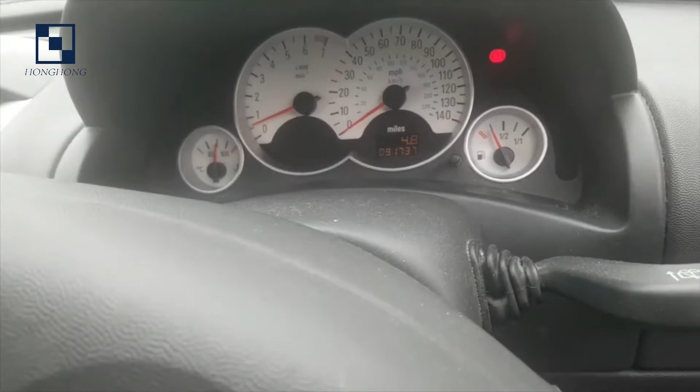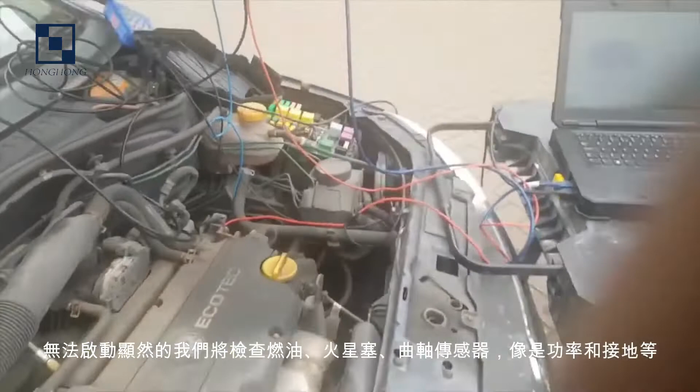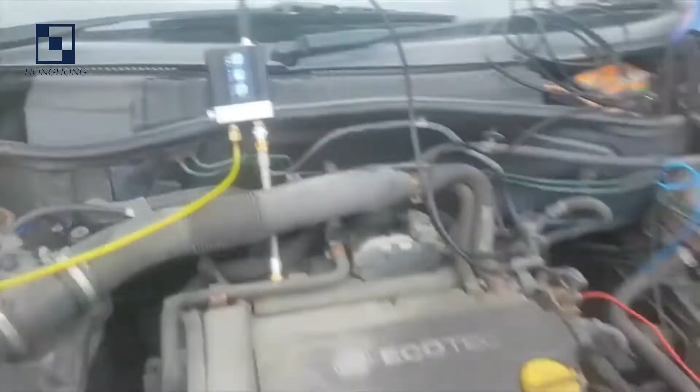There's no fault codes on the dashboard and there's nothing that flags up when it is faulting. So a quick scan check actually didn't reveal anything, which is slightly annoying. Yet sometimes it will crank with no start. So crank no start, obviously we're going to be looking at fuel, spark, crankshaft sensors, things like that, powers and grounds, etc. So immediately what I did was I got hooked up WPS into the fuel pressure rail, and underneath

we have a crank sensor, which hopefully you can just about see through there, and we have that back pinned out on the two pins. This is a floating sensor, so obviously we have to back pin both sides, and then if we want to do any calculations we can use the maths channels within the Pico 7 software.

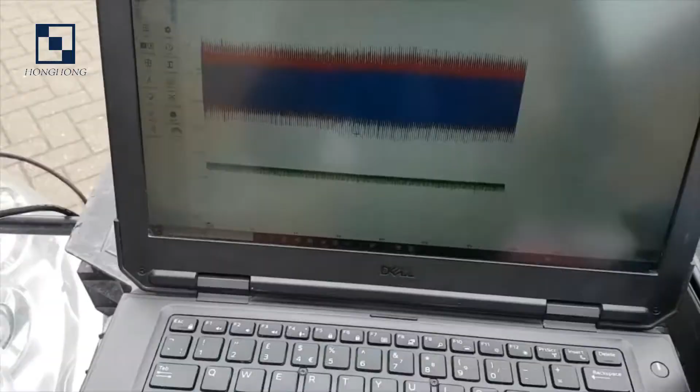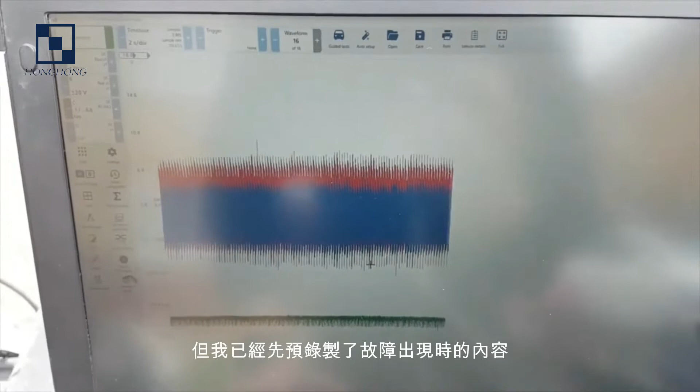What's really interesting is when we're watching this sensor we can actually see that the amplitude sometimes changes between the two channels. Now as I said, this is an intermittent fault as well, so the likelihood of it playing up whilst I'm recording is very, very unlikely, but I have managed to get some pre-recordings of this with it actually faulting. So there we go, we can actually see that just there all of a sudden it's just changed its amplitude. Now the actual note of the engine is still the same, but we can clearly see that we've got something going on that isn't quite right, that something's changing.

You can see there. This is just coming from the sensor, so like I said, it's just purely an inductive sensor. It is floating. I hear a lot of people say we should be actually checking at the ECU itself. The ECU is buried on this, so to actually try and get to it is a bit of a nightmare. But what we thought we'd do is, based on ease and accessibility, we've just gone straight to the sensor, and already we can see that something isn't quite right.

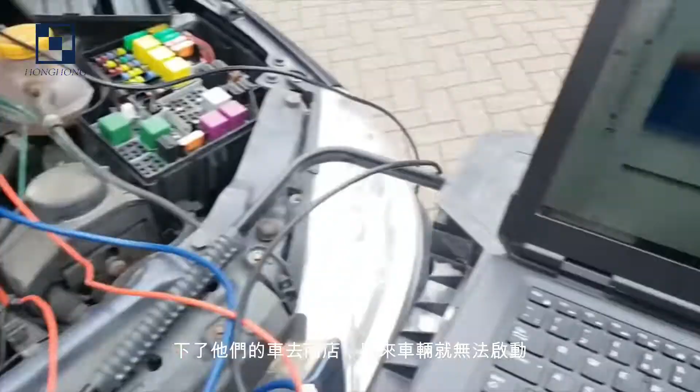So what I'm going to do is I'm just going to leave this recording and we're just going to see if we can capture this on the screen. You can see here that the engine is actually up to temperature as well, so another interesting point to make. This actually was first noticed by the customer after they'd been on quite a long drive, pulled up, got out of their vehicle and went to the shops, and then come back out and the vehicle wouldn't start. Left it for a few more minutes and then it did actually start up. So we do think that we are looking at a temperature related fault.

And as I said, the likelihood of this actually doing it now is probably very unlikely, but we're going to keep watching and keep filming and hopefully we'll get to the bottom of it. What I'll do is I'll actually put the camera down on the engine bay and I'll record my screen at the same time, so when the fault does happen I can quickly catch it. You should be able to see that the engine and the engine note will also change as it tries to recover from a complete loss of what would appear to be a crankshaft position sensor.

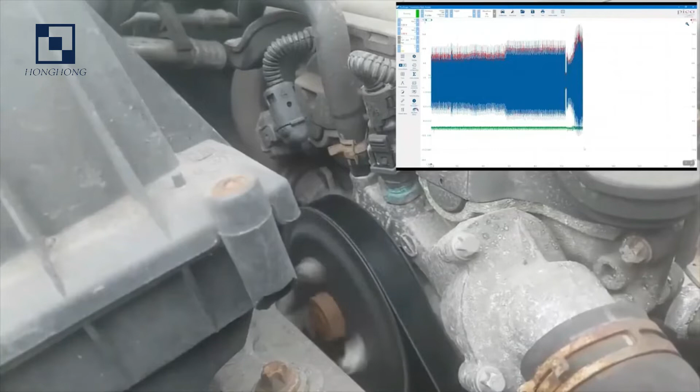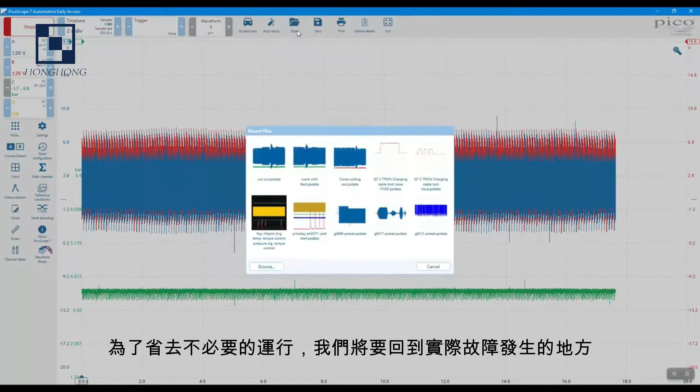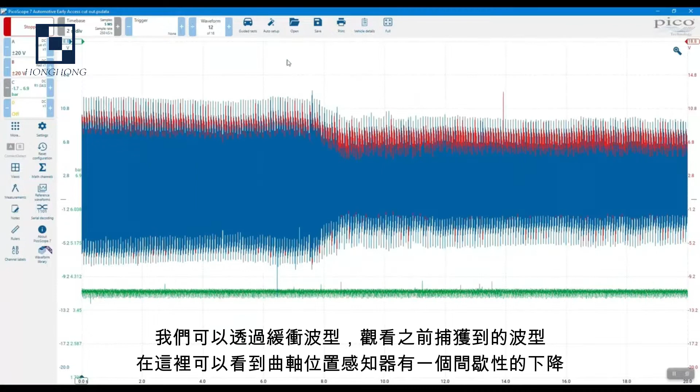Okay, so to save having to keep running this, what I'm going to do is just go back to where the actual fault occurred. So hopefully in the video we should be able to pick out where the fault happened. Obviously we can use the buffer waveform, we can run back through the captures, and we can see here that we had an intermittent dropout in the crankshaft position.

Now if we zoom in on this slight patch here, what we can actually see is that the crankshaft sensor has actually shorted itself together, so we can see the amplitude is massively reduced and we've lost this pattern where we should have an opposite or a mirror image of the sensor. At that point in particular, it's actually joined together and it's outputting the same signal. So it must mean that they've joined themselves together.

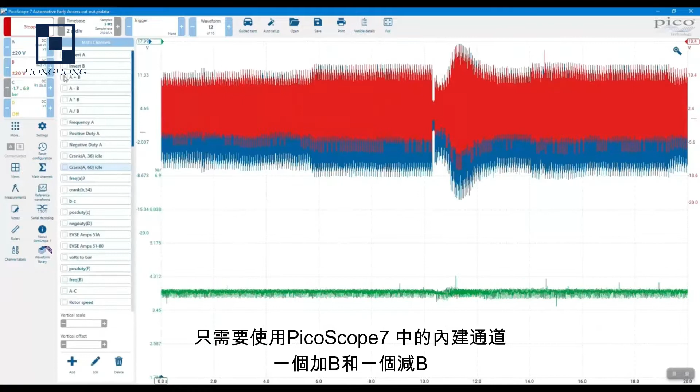So what we can do is some simple maths, just using the built-in maths channels in PicoScope 7. If I just do A plus B and A minus B, get rid of fuel pressure, I know that's not the issue. But can you see there that by adding the two together we can quickly see when something's actually changed, and also when we've got the true amplitude by doing the A minus B.

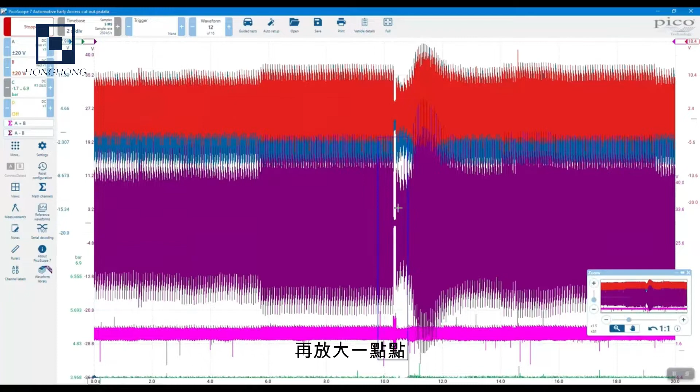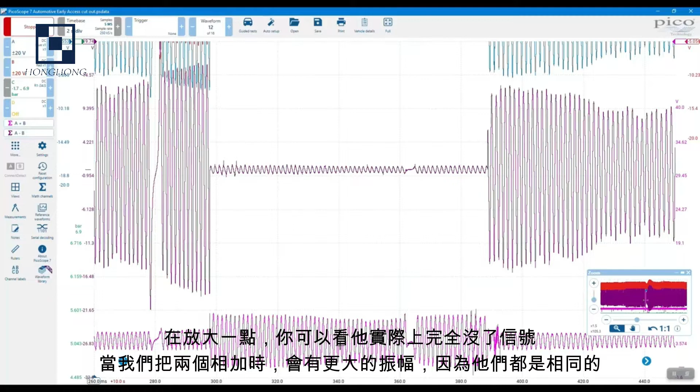So zoom in around this a bit more. Get a bit closer, you can see there that it's lost its signal completely. When we're adding the two together, we actually get a much bigger amplitude or output, because now they're both the same.

Alright, so what I'm going to do now is get that crankshaft sensor out. We're going to have a little look at it. I believe it is temperature related, so when it is shorting itself together, I will try and put some heat onto it and see if we can get the resistance to change using the resistance lead, and hopefully prove it one step further. I'm fairly confident that even from that we can already see the problem, but let's do a bit more digging. Right, cheers.

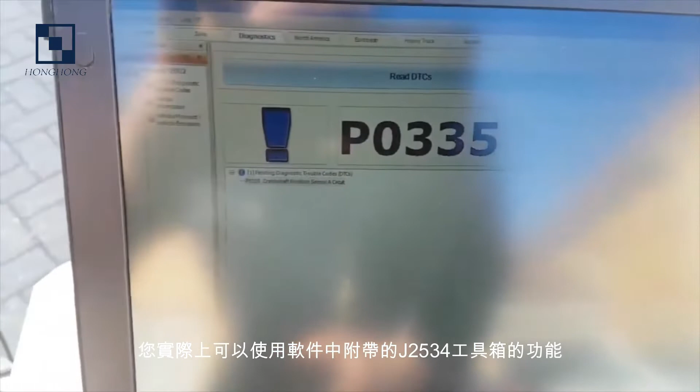Okay, so as luck would have it, this car has now changed its fault condition. I took the crankshaft sensor out and couldn't get a resistance reading off of it, put it back in, and now I actually have a fault code. So for those of you that are using the Mongoose lead that we get with the MVH kit, you can use something called the J2534 toolbox that comes with the program. This will allow you to read some vehicle emission related data and trouble codes.

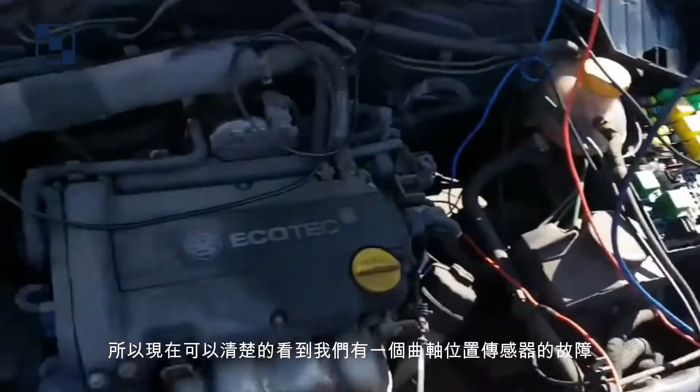So as you can clearly see now, we have a crankshaft position sensor A circuit fault. So pretty confident that it is the crankshaft position sensor, so I will get one ordered up. Hopefully we'll get it fitted and then I'll be able to update with a post capture and hopefully a known good as well. Alright, cheers guys.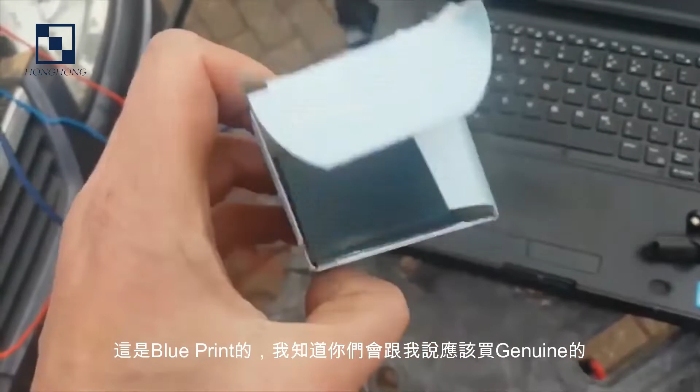Okay, so we're back on the Corsa. We now have a new crankshaft position sensor. This is a Blueprint one, which I know people are probably going to argue with me and say I should have got a genuine one, but when costs come to it, this is actually pretty good and also quite inexpensive for what it is. So what I've done is set it up just using the resistance lead, which is part of the 4425A kit. This bit's going to be fun because I want to try and show the results whilst I measure it. So we'll see how we get on recording this.

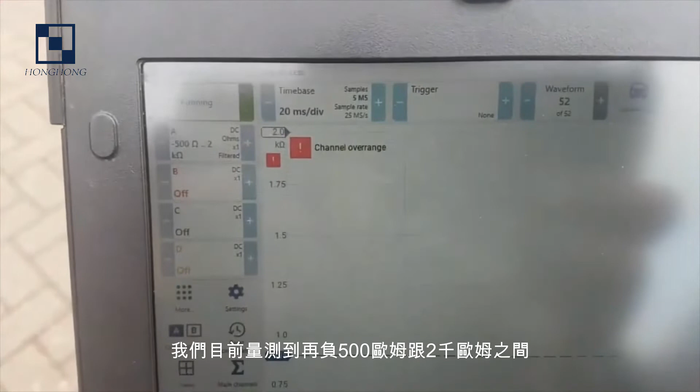So what we're going to do is take the original one. I'm just going to set the scope up here to record, just to get a bit more time on the screen. So if we can see on there, we've got 20 milliseconds per division. We're running at the moment between minus 500 ohms and 2 kilohms. You can put this on auto as well, and it will do what it needs to do.

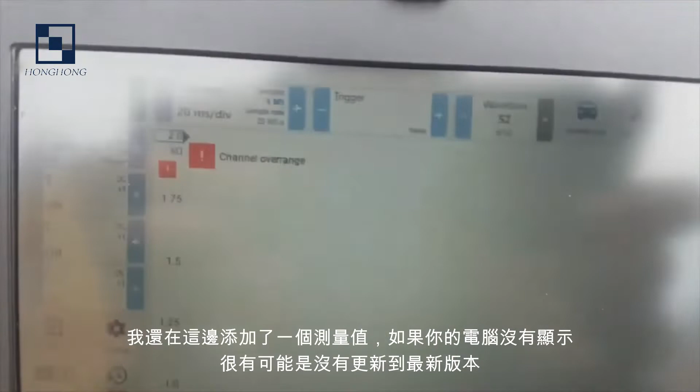And I've also added a measurement on there as well. It's just the mean. Now, if you're in streaming, obviously that doesn't get updated until the end. But if you're in block mode, so anything under 200 milliseconds per division, it will actually update every time. So a bit like a multimeter view.

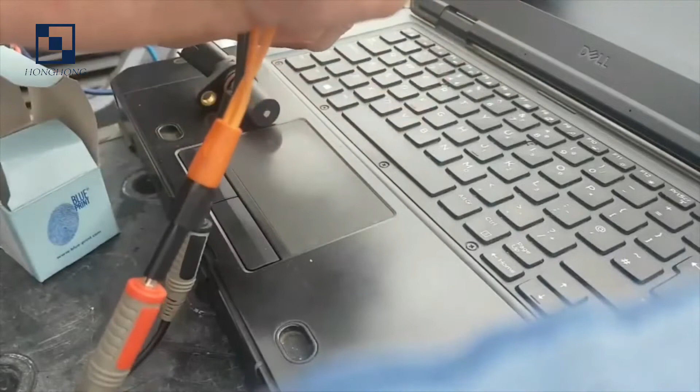So what I do is I'll capture my screen at the same time so you can see what's actually going on. So we'll start off with that. This is their original. And if I connect across there, actually the result that we've got is channel still over range, so indicating an open circuit.

Now if I do the same thing to the new one, we should hopefully have a resistance. That's what we're looking for anyway. And there we go. So with the crankshaft sensor connected, I've now got a reading of about 900 ohms. And there's just a bit of a baseline to give us an indication as to what to look for in the future as well.

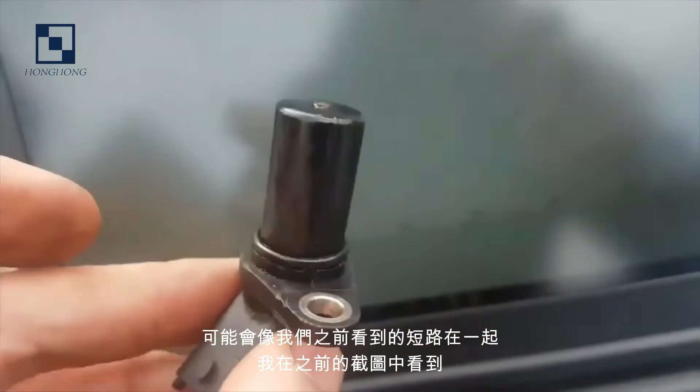So I expect what's happened with the old sensor is that it was intermittently potentially shorting out together like what we saw in the previous captures, and now it's actually gone fully open. So hopefully, fingers crossed, there's a clear difference between the two, so popping that one in should see the fix, fingers crossed.

Right, okay, so the crankshaft sensor has been fitted. We have cleared the codes out using the J2534 toolbox, so we're all clear. So we're ready to start it up and test it again. Now, a quick little tip: after you've got your faulting condition capture, it's worthwhile going back and loading that back in. One, because we can actually create a reference waveform of, say, let's do A and B. So this is when it was faulting.

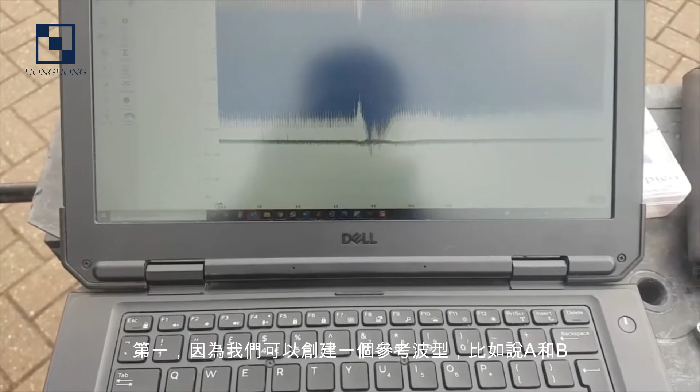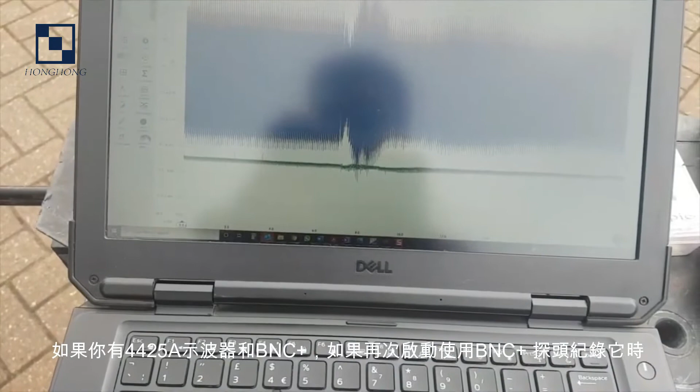But also, if you've got a 4425A scope with BNC Plus, if you recorded it with BNC Plus probes, when you go to start it up again, it will actually give you a probe mismatch. So it's asking which things match. Now I had WPS on here originally. If everything matches up the same, then it will just go straight forward. I'm not going to do WPS this time because I know it wasn't the problem. So I'm going to just leave that as probe not detected and just click run with found probes.

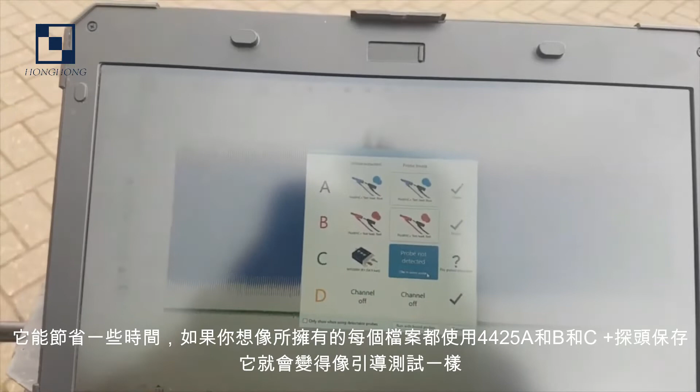Now if you wanted to, I could add WPS in, and then once we've got it all connected, it will just start the test automatically. Why is that important? Well, it just saves a bit of time more than anything. And if you think, every file you now have that's been saved with a 4425A and BNC Plus probes suddenly becomes almost like a guided test. So yeah, just a little tip.

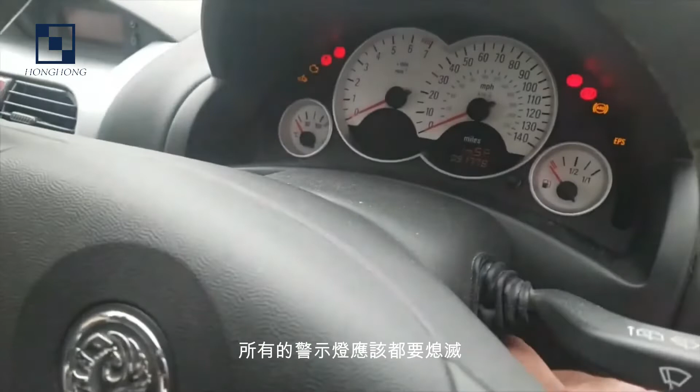So right, we should be able to start it up. We've got our reference waveforms in the background. You can see we're running. So I'm just going to go and start the car. So warning lights should all be out now. Good stuff, and the RPM gauge is working. So we'll come back round.

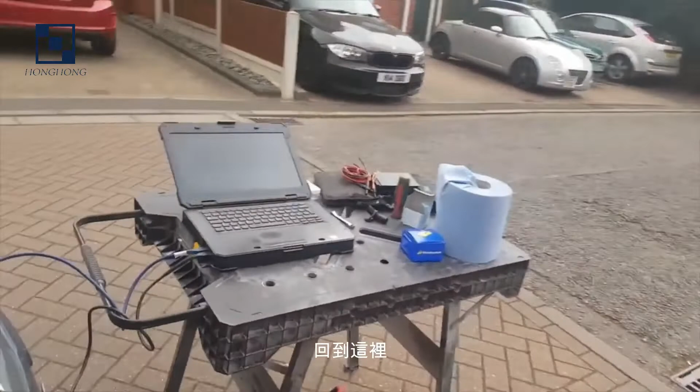Now we can see what you've got in the background, which is quite interesting. We've got a real big difference in amplitude, haven't we? So that's something to bear in mind. But yeah, so now we've actually seen what it was before against what it actually is now, all on one screen. If you wanted to, you could separate that out, so you've got your reference at the top in its own viewport. I'll quickly do this.

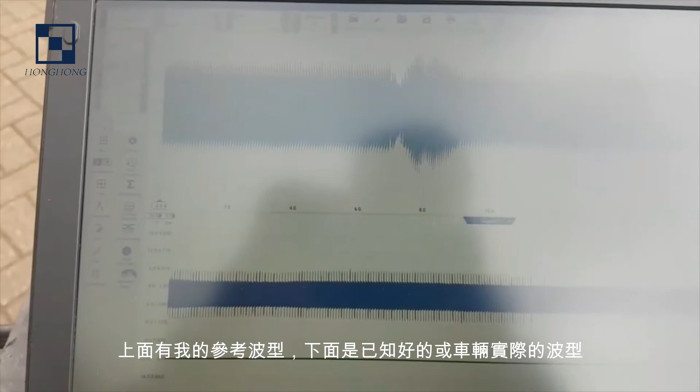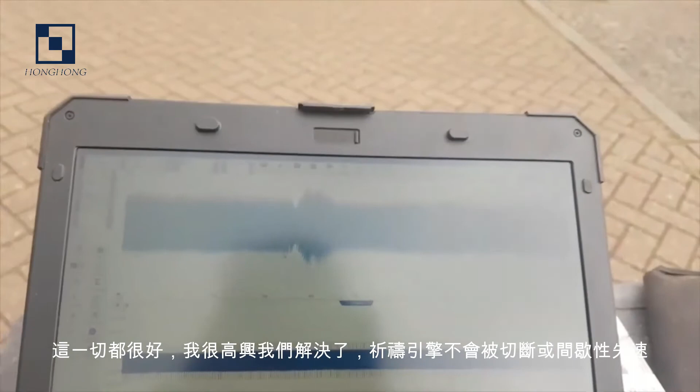If I add a scope view, there we go. So if I go back to scope 1, and if I turn off all the active channels, so I just have my reference ones, I've got my reference waveform in the top and my now known good, my actual vehicle, captured underneath. So yeah, all looks good, so I'm happy that this is all sorted. So fingers crossed, no more cutting out and intermittent stalling.